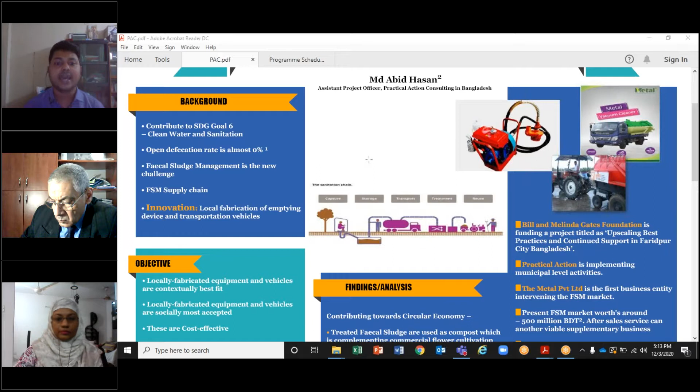We have attempted to introduce innovation in this FSM supply chain. Our innovation is local fabrication of emptying devices and transportation vehicles.

What are the objectives of this paper? First, it states that locally fabricated equipment and vehicles are contextually the best fit—meaning they will be socially, socio-economically, and infrastructurally the best fit for our country, especially for the peri-urban and rural areas.

Another point is that these locally fabricated equipment and vehicles are socially most accepted, especially by the sanitation workers who directly work with these devices, and by the beneficiaries, municipal level officials, and development workers.

These local fabrications are obviously cost effective, as we are fabricating these local vehicles and equipment using our local resources. They are very easy to maintain—our local technicians and mechanics can do the maintenance job easily. And finally, these local fabrications create more local employment.

What was our methodology for this paper? We followed a qualitative approach, and our main data collection tools were focus group discussions, where representatives from sanitation workers' cooperatives, municipal officials, and both international and national level development workers, donors, and municipal authorities took part.

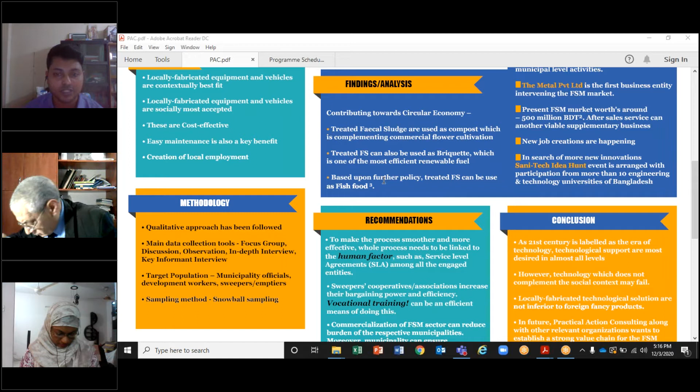Our target population were the municipality officials, development workers from both national and international organizations and donor organizations, and sweepers and emptiers who use these locally fabricated vehicles and devices. They were the main target population of our paper, and the sampling method we followed was snowball sampling.

Our theoretical framework looks like this. Our basic hypothesis was, as you can see on the left part of the screen, that locally fabricated technology strengthens the viability of the FSM service and contributes better to ensuring circular economy.

If you look at this circle, this first circle indicates that local technologies ensure better service. It means if we use these local technologies instead of manual facilities or manual systems, then more fecal sludge can be treated.

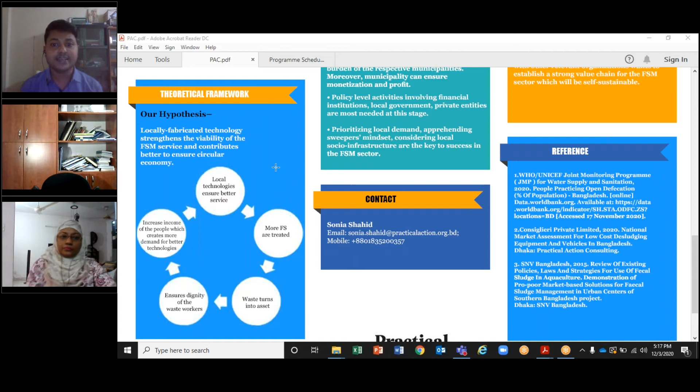By this, more fecal sludge can be treated, and when it can be treated, this waste can turn into asset. This ensures the dignity of the sanitation worker, because in the past it was perceived that the sanitation worker works with waste. But when they can establish that we don't work with waste, rather we turn this waste into an asset, their work dignity increases, and their income also increases. When their income increases, their lifestyle improves, and it creates more demand for better technologies which complement the local technologies that ensure better service.

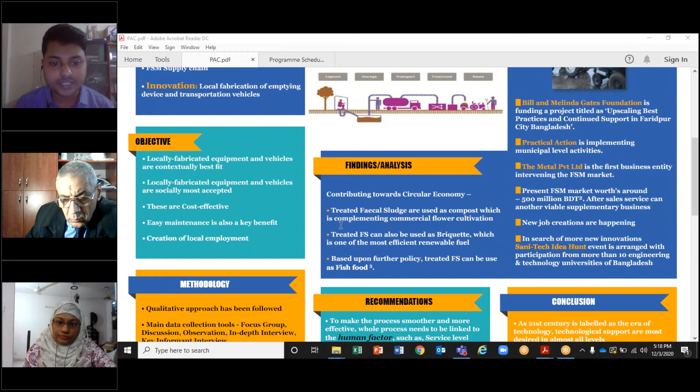So that was the basic theoretical framework of our paper. Let us look at the findings and analysis. First we will discuss the contribution towards circular economy, which indicates how this treated fecal sludge can complement circular economy. The first point indicates commercial flower cultivation in several parts.

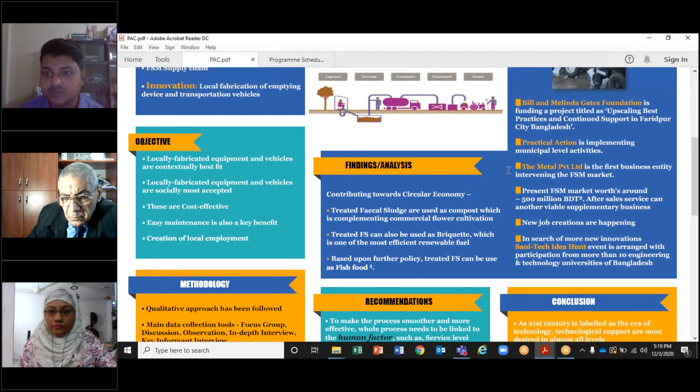There are some other analyses from our study. Before going to that, let me show you these three pictures. The left picture indicates a high capacity sucker pump which can collect fecal sludge from the containment in a very efficient and fast way.

The second part is a vacuum cleaner, generally known as a vacutug, which carries the fecal sludge to the treatment plant, and this vehicle can access narrower roads in the peri-urban areas of our country. The third picture, below, is a similar vehicle, but the difference is it is run by a tractor, which is more suitable for rural areas.

So these are the innovations we are working on to contribute to the fecal sludge management sector.

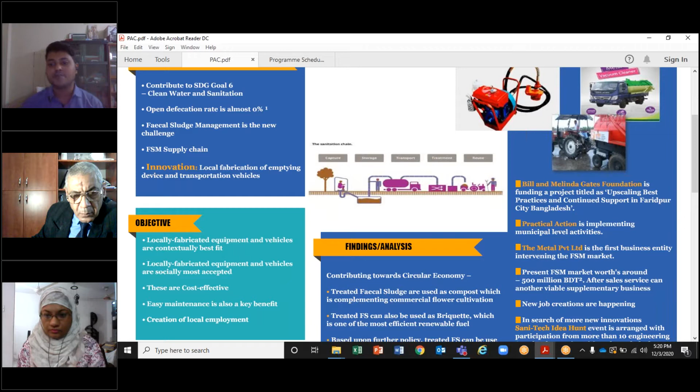As you know, Practical Action Consulting is the consulting arm of an international NGO. In this project we are funded by the Bill and Melinda Gates Foundation, and this project is titled Upscaling Best Practices and Continued Support in Faridpur City, Bangladesh. Practical Action is implementing the municipal level activities. Metal Private Limited is one of the first business entities interested to intervene in this FSM market to commercialize.

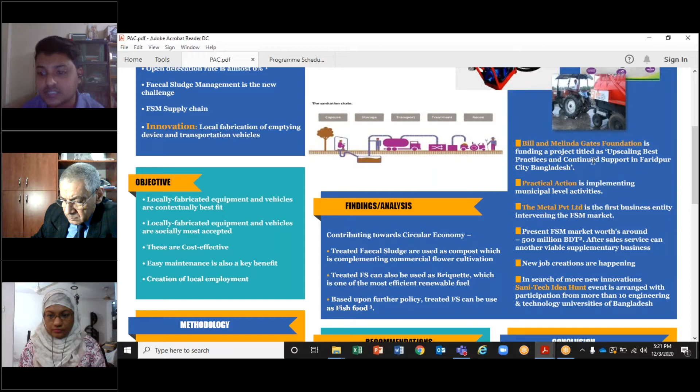As you can see, the present FSM market worth around 500 million Bangladeshi taka in Bangladesh, and the after-sales services can also contribute better in this sector.

We are not stopping here. We are also trying to generate more innovation and engage more people in this FSM sector. In that regard, we are arranging a Sanitech Idea Hunt competition where 10 universities—engineering universities, science and technology universities, and agricultural universities of Bangladesh—are participating and trying to generate new ideas to contribute to this FSM sector.

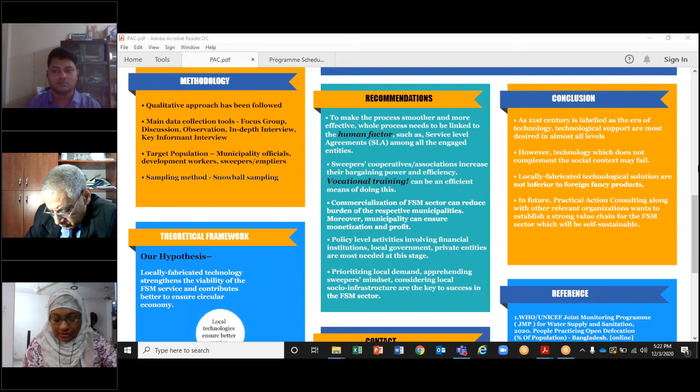In conclusion, fundamental science and applied research, coupled with market and customer needs, and the process of technology maturation through commercialization will be key to the success of establishing a strong value chain.

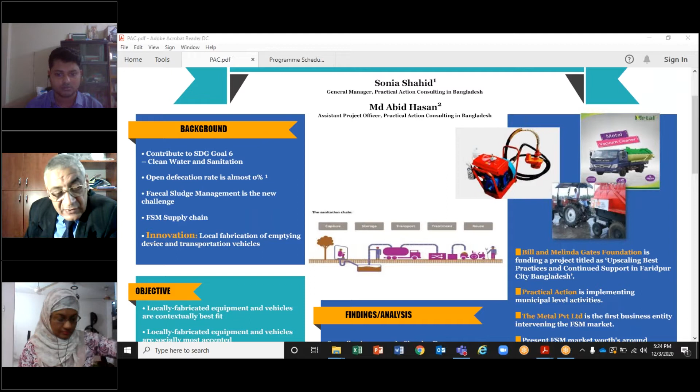But I am very concentrated on one point: when this fecal sludge is sterilized—or pasteurized, I don't know which—you didn't mention clearly what disinfectant technique is used in this sludge preparation. Because when preparing sludge for agriculture, you have to be careful about three points: first, pathogen free; second, heavy metals should be at a minimum level, meaning we are not going to accumulate heavy metals in the soil when treated with this material; third, organic molecules—meaning the sludge should not contain compounds such as hormones. So are you sure these three points are addressed in your sludge?

Because if your sludge contains animal hormones, it would be very dangerous to use in agriculture, or even if you release this material into the river or any natural water resource, it would cause a very high effect. And what about the heavy metals? Because you are not going to select the sludge only from homes—you select the sludge from the main pipe, and the main pipe contains many contaminated materials.

Yes sir, the technologies we are developing collect from both homes as well as from the pipes, and there are a few more technologies that we are working with.

I didn't understand 'from at home.' What do you mean by at home? It means at home you have two ways, for liquid and for sludge. Yes, so every home has a septic tank.

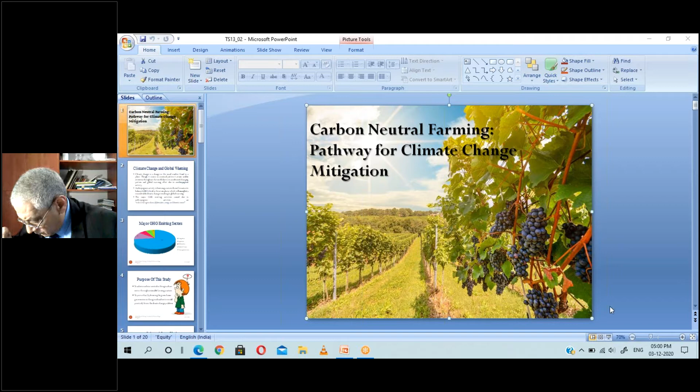Okay, good evening everyone. Myself Barney Priya. I'm here to present about carbon neutral farming, a pathway for climate change mitigation.

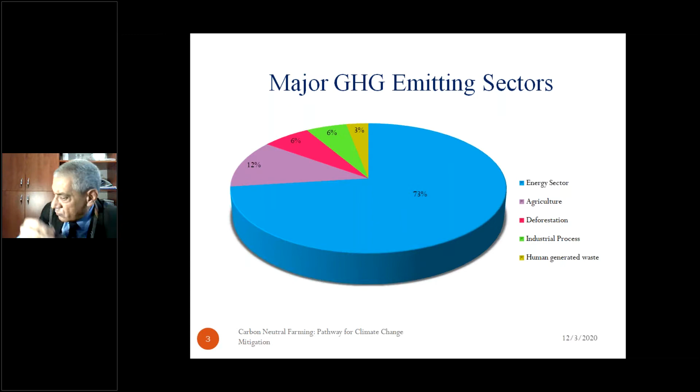The anthropogenic activities responsible for greenhouse gas emission: the energy sector holds a major dominant share of about 73%, followed by 12% by the agriculture sector, 6% due to land cover and land use change pattern like deforestation, 6% due to industrial processes, and 3% due to domestic waste generated by human beings. It is evident that next to the energy sector, the agriculture sector shares a major role in greenhouse gas emission due to human activities.

So the purpose of this study is to achieve carbon neutral farming in agriculture through sustainable farming practices, and to prove that by lowering the greenhouse gas emission in the agriculture sector, we would positively lower the climate change problems.

So we have selected a grapeyard of area of 1 acre in Dindigul, having geographical coordinates of latitude 10° north and longitude 77° east, having a tropical climate with an average temperature of about 27.8 degrees Celsius and annual rainfall of 717 mm.

The conventional practices carried out in the farm: first they prepared the land by tillage practices to remove the previous cultivation crop and remaining weeds. Next to the tillage practices, they constructed a trellis structure which supports the growth of the grapeyard. After constructing the structure, the plantation is done usually between December to January, followed by irrigation activity.

So carbon footprint auditing is carried out to find out the amount of greenhouse gases emitted in the farmland, starting from cultivation to harvesting. So in a grapeyard, it takes around 120 days for the grapes to harvest.

The possible greenhouse gases emitted through the grape yard are 49.2% nitrous oxide, 34.4% methane, 14.1% carbon dioxide, and others including hydrofluorocarbons if the grapes are stored on-site using refrigerators.

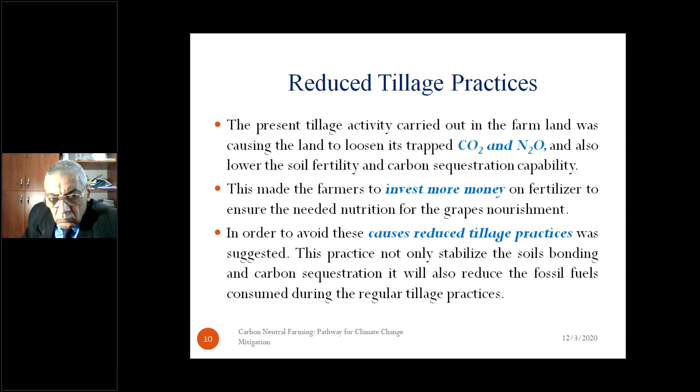So farmers need to invest more money on fertilizer to ensure the needed nutrition for the grapes' nourishment. To avoid greenhouse gas emissions due to tillage practices, we suggest going for reduced tillage or no-tillage practice. By doing so, it not only stabilizes soil bonding and carbon sequestration, it will also reduce the fossil fuel usage for tractors and power tillers used for tillage.

The next is manure management. Manure management is most important. Manure is the most important thing for a plant's growth. In particular, nitrogen is a very essential element for plant growth and development.

In the case of excess application of fertilizer, excess nitrogen is lost in ionic or gaseous form through leaching and volatilization. It would affect both the soil and the groundwater. Also, excess application of nitrogen fertilizer leads to eutrophication, which affects the aquatic ecosystem, and it also contaminates the groundwater, causing hemoglobin disorders in human beings.

On the other hand, lower application of nitrogen fertilizer causes nitrogen deficiency to the plant, which affects the growth and yield. So we suggest going for organic fertilizers because they can adapt naturally, get adjusted to the soil, and excess nitrogen can be easily absorbed by microbes compared to synthetic fertilizers. As an added advantage, this would also reduce greenhouse gas emissions from the production and transportation of synthetic fertilizers.

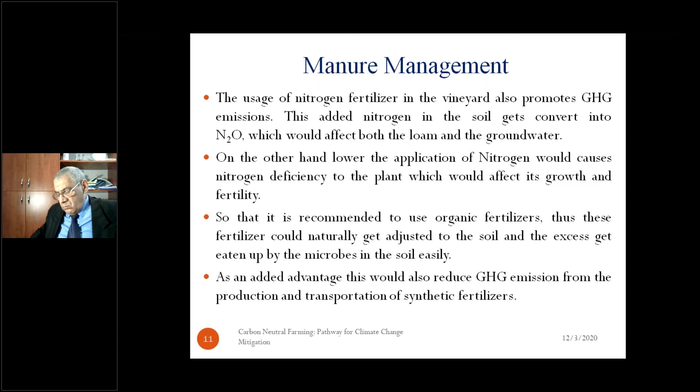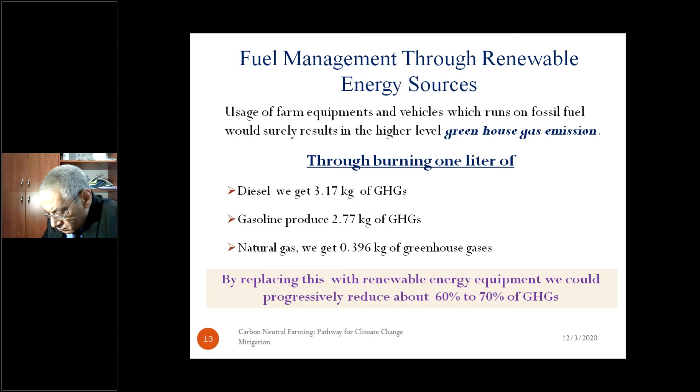But it is difficult to estimate the amount of manure required for land because it changes from place to place. The above suggested methodology will reduce around 55 to 60% of the carbon dioxide and other greenhouse gases. To sequestrate the balance of carbon, farmers can go for cover crop management.

So we conclude that conventional practices used in farming produce more greenhouse gases than the suggested alternative methods, and this not only benefits the farming ecology but also saves money for farmers, since all the proposed alternative methods are sustainable and nature-oriented steps. It is obvious that attaining carbon neutrality in the agriculture sector is a lot easier and more cost efficient compared to any other sector.

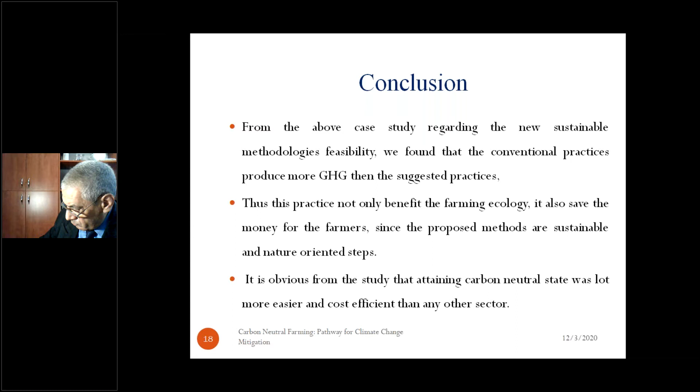The scope of this study is that this type of methodology can be adopted for various crop varieties, and it also reduces greenhouse gas emissions to a greater extent, especially in India, because India stands second in holding arable land of about 159.7 million hectares, next to the United States. If we practice this kind of sustainable method, it will greatly reduce greenhouse gas emissions, and we will have remarkable progress in addressing climate change and global warming.

Thank you for giving me the opportunity.

Thank you very much for your interesting topic. Due to my job, I am interested in this topic too, because I work a lot on climate change and soil quality. Can you tell me how we know that climate change is due to human activities? And can you tell me how climate change can affect soil quality?

Sorry sir, can you repeat once? The question again: how can climate change affect soil quality? Sorry sir, I couldn't hear you properly. Sorry for asking again, my question is how can climate change cause changes in soil quality? Soil quality, yes sir.

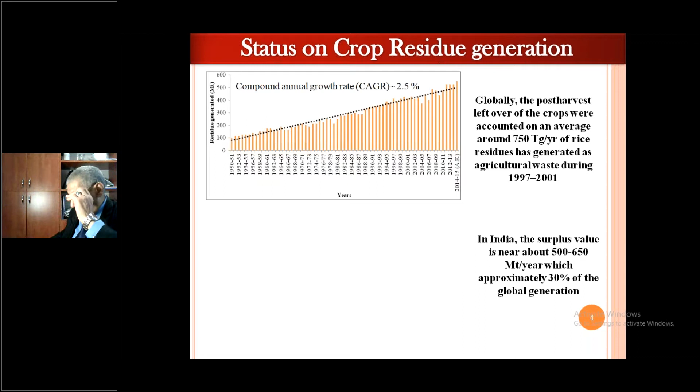This is a small diagram showing how the generation of food waste has been generated in India from 1950, since its independence, to today, and this is the trend of how it's increased—totally around 750 trillion grams of waste being generated during this time.

It's not only affecting our environment, it's also causing loss of various nutrients which can affect soil fertility. Even the agriculture industry is considered one of the greatest GHG, greenhouse gas, contributors—contributing around 12% of total GHG emissions.

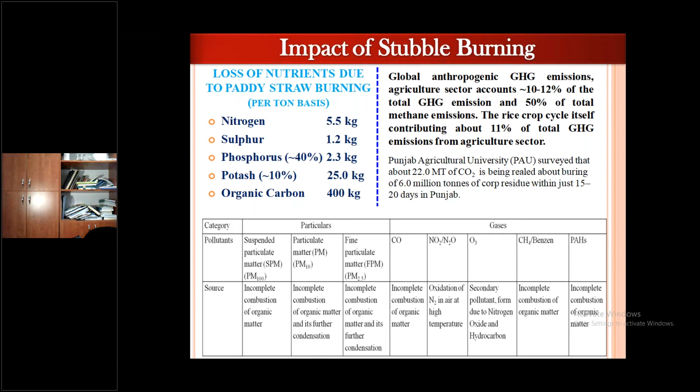These are data showing how different types of other GHGs like SOx, NOx, and other VOCs are generated from biomass burning, which is generated as crop residue. So we can say that in summary, it's not only affecting the regional place where this crop stubble is burning, it's also affecting other places.

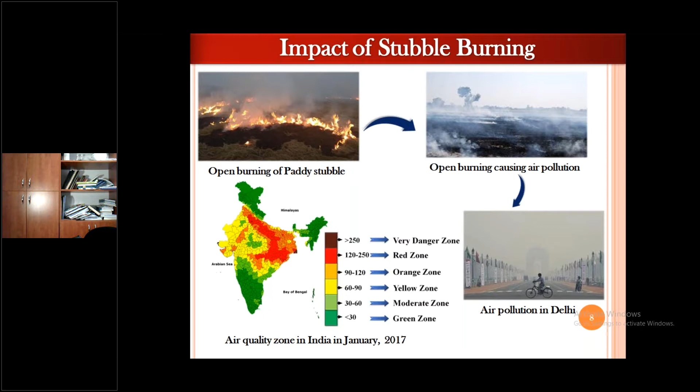It's considered unsafe to breathe in Delhi, our capital of India. In a nutshell, residue burning causes global warming, emission of greenhouse gases, release of particulate matter, loss of biodiversity, deterioration of soil fertility, and other detrimental effects on our ecological health.

So what can we do about that? There are alternative uses of crop residue. First is the generation of bioenergy. There are a few in India—recently some bioenergy thermal power plants have been installed which utilize this crop residue to generate thermal energy converted to electricity. The Punjab Energy Development Agency has already developed a few plants, and they have a target to generate around 500 megawatts of power from this paddy stubble based thermal power plant. This approach can be taken up throughout India to mitigate this issue.

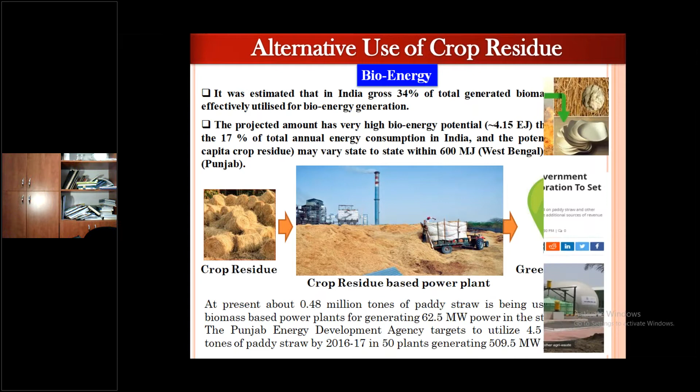Other than this, some enterprises and entrepreneurs are trying to develop other commercial products like tableware or food containers and medium density fiberboard, which can replace the use of thermocol and plywood, both of which have detrimental effects on the environment.

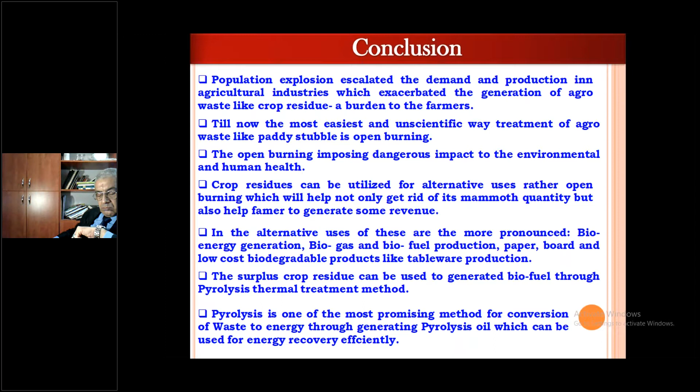In conclusion, due to the population explosion, food demand is increasing. That's why there is huge pressure on the agriculture industry, and as crop demand increases, crop residue also increases, which is one of the biggest burdens to farmers. To get rid of it, farmers usually burn it out in the open environment, which causes serious health issues and environmental effects on our climate, contributing to climate change.

So, other than burning it, we can put it to alternative use, which not only helps mitigate the detrimental effect on the environment but also provides some revenue to the farmers from whom the crop residue comes. Other than byproducts, the surplus crop residue can also be treated to generate biofuel through heat treatment, the pyrolysis treatment process.

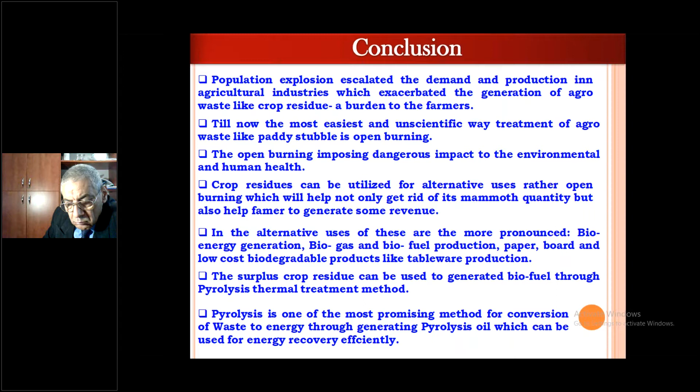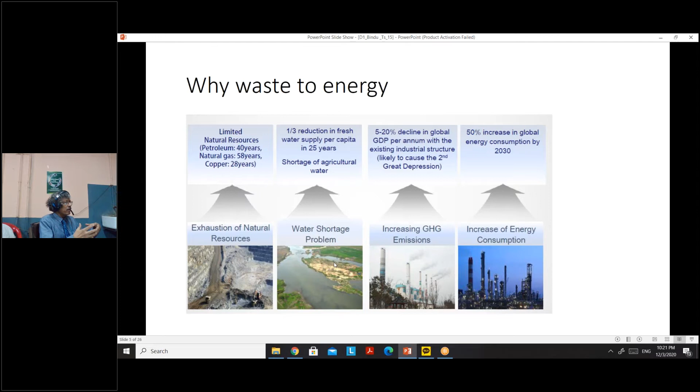There are limited resources in our environment, water shortages, increases in greenhouse gas emissions, and increases in energy consumption. So why waste to energy? Is there any solution? We are hoping that using waste as energy could provide some solution environmentally, economically, and in terms of energy.

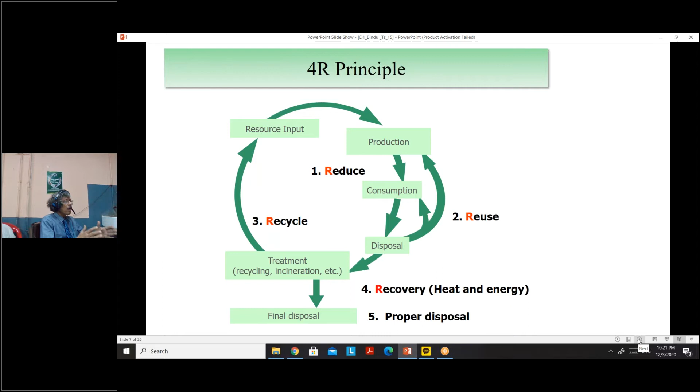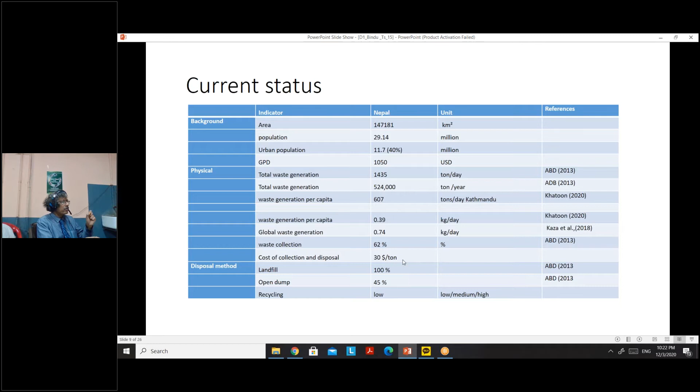This is some of the current status of Nepal - background, physical status, and disposal methods. We have about 29 million population with 40% urban area, and around 1,000 GDP. In terms of waste generation, we see about 524,000 tons per year, which is about 0.4 kilograms per capita per day - not that much compared to the global average. We spend almost $30 for collection to disposal, and the most common disposal method is landfill.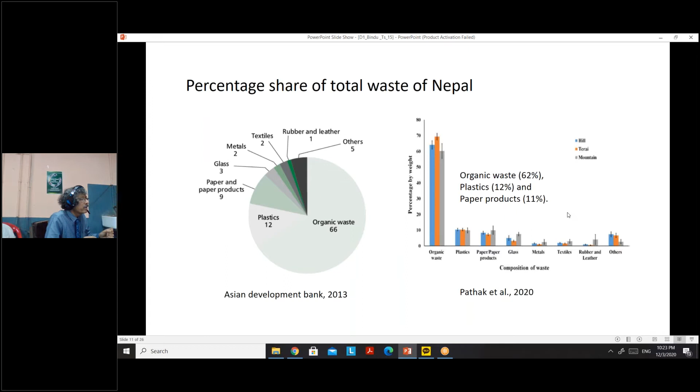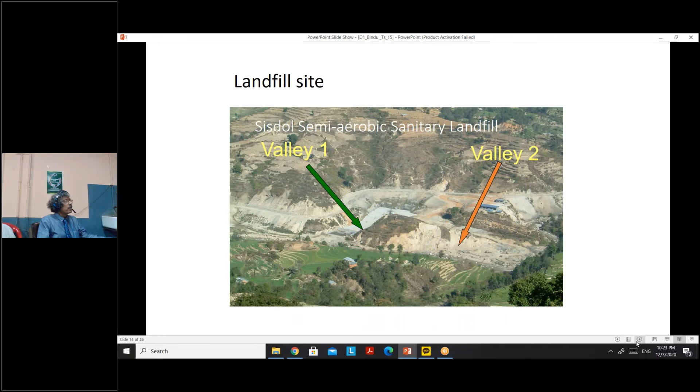These are some photos showing how we manage waste. For collection and transportation, we basically collect all kinds of mixed waste, then segregate it at the landfill site manually. This is an example of our landfill site, which reflects very poor conditions - we simply unload the waste, spread it, and do very simple soil covering, with no other technology.

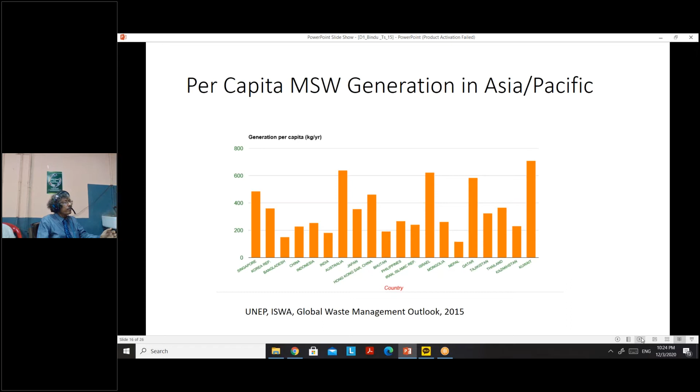If we compare waste generation in Asia and the Pacific, we are actually okay in terms of generation - we are among the lowest countries compared to others.

However, some countries like capital Kathmandu and other urban cities generate lots of waste. When comparing per capita generation, Nepal and India are doing pretty good compared to other Asian countries.

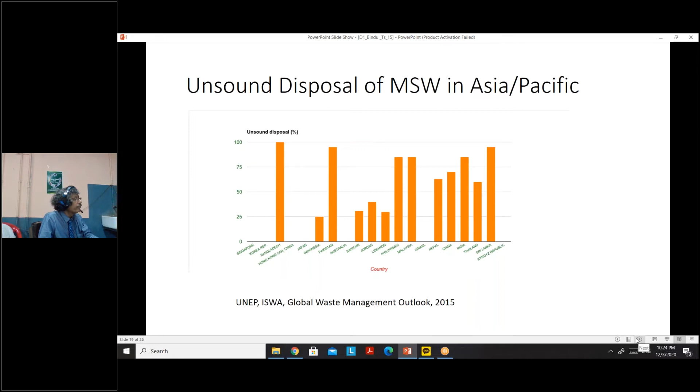But the problem is unsound disposal. More than 65% of conditions involve disposing waste in the bad, improper way. Unfortunately we don't have data about recycling in Nepal, so this is also not good. However, there are very few percentages of informal recycling and composting going on.

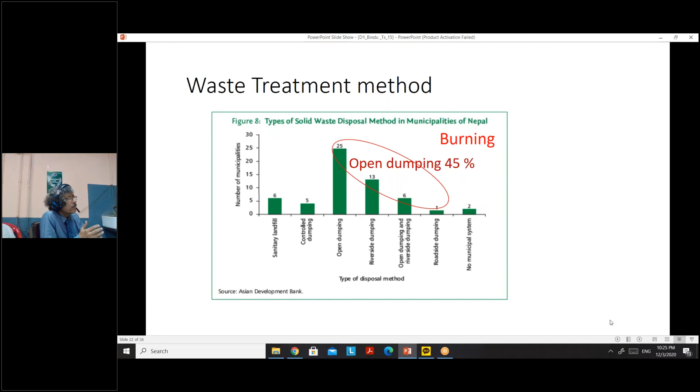So we do waste treatment mostly by open dumping, which is about 45%, and the remaining is burning. We can see sanitary landfill and control is less than 10%. So I'm just thinking this may be one way to manage the waste.

So we divide municipal waste into organic and inorganic, and organic, general, and recyclable waste. General waste we can treat with different technology to produce gas, electricity, and energy. With organic waste, through biological treatment, we get gas and compost. Then the remaining residual goes to landfill for methane collection.

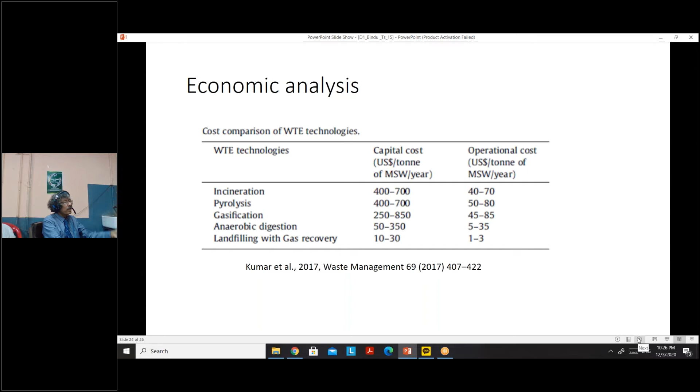We have to consider economic analysis, especially for countries like Nepal where we are very poor with low GDP. Having incineration and pyrolysis, both operation and capital costs are much higher, so considering this analysis we have to make some plan.

To summarize, first of all we must segregate waste at the source, which is most essential. Then the suitable methods for Nepal's case are composting and anaerobic digestion, and then we can move to incineration and sanitary landfill. Recovery means energy extraction from waste by incineration.

We may use incineration for waste management, however if we want more energy, we need more waste. This approach is also problematic. So if reduction, reuse, and recycling do not come ahead of energy recovery, we may discharge more waste and combust it. So emphasis goes to reduction, reuse, recycling, then recovery and proper disposal.

So we have to develop our policy mix to implement institutional arrangement and public awareness, and also behavior changes of our citizenship, and then finally we must have some investment from the private sector to fund waste to energy for proper waste management. This is the end of my presentation, thank you very much.

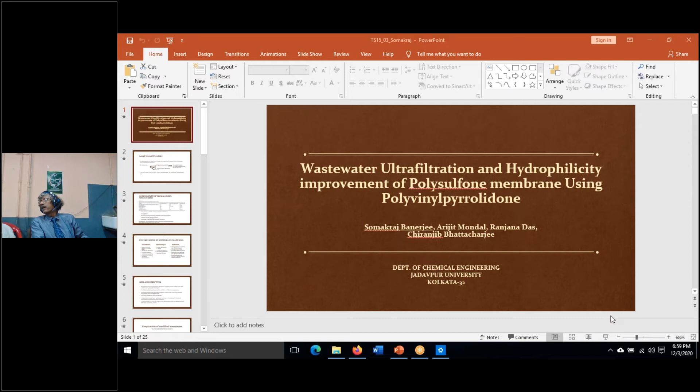Please continue. Good evening everyone. I am Somakraj Banerjee from Jadavpur University, and I will be presenting my work on wastewater ultrafiltration and hydrophilicity of polysulfone membrane using polyvinylpyrrolidone.

So first we start with what is wastewater. It's a combination of liquid and water transported waste from industrial sources, and it contains organic, inorganic matters and gases. In this particular work, I will be working with organic matter, that is protein.

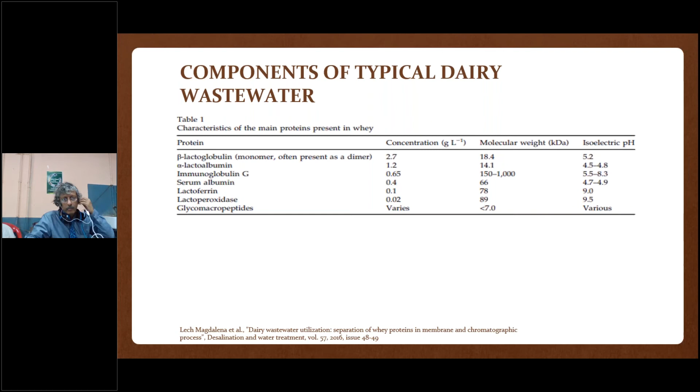So I will be working with typical dairy wastewater, and these are the typical characteristics of dairy wastewater. The proteins of interest are serum albumin, lactoferrin, and lactoglobulin. It works as an antioxidant by protecting lipids from oxidation, so it has importance in food and pharmaceutical industries.

So I have chosen polysulfone as the membrane material, which has superior thermal stability, a glass transition temperature around 200 degrees centigrade, mechanical robustness, and chemical resistance. But it also has some disadvantages, like it is strongly hydrophobic in nature, which limits its permeability in wastewater treatment, and poor fouling resistance.

So I have tried to add polyvinyl pyrrolidone into the system to increase its hydrophilicity, and I have used polyvinyl pyrrolidone in different weight percentages to see the changes in the system.

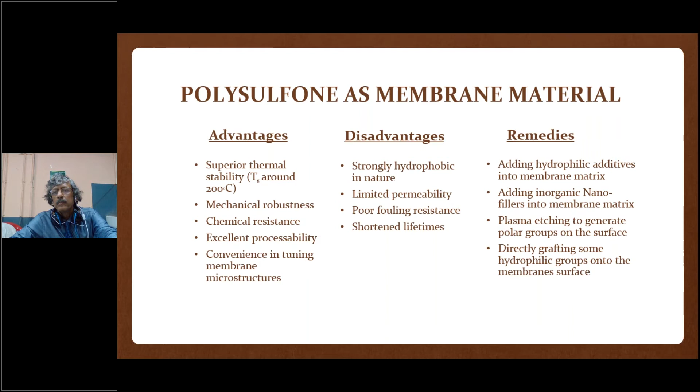So these are my aims and objectives. The primary objective is modification of the membrane with an additive and characterization of the prepared membrane with liquid-liquid displacement porosimetry and transition test, and to experiment in a wide pH range to find pH dependency of the membranes and the whole separation process, and preparation of model dairy wastewater and use it for wastewater treatment application by the selected best method.

The materials used are polysulfone of 35 kDa, polyvinyl pyrrolidone of 360 kDa, and dimethyl acetamide as the solvent, and deionized water as the non-solvent. This is the composition given in my membranes.

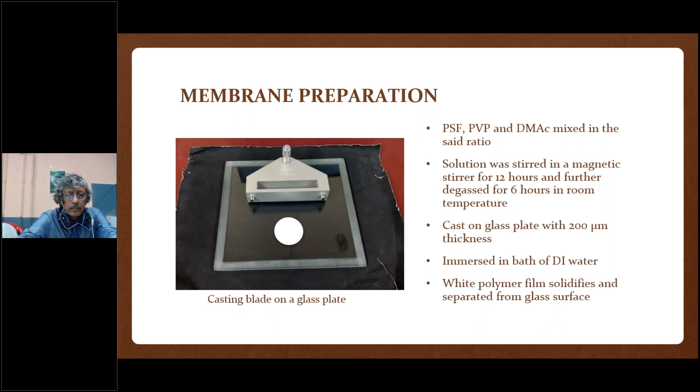This is the prepared membrane. The solution was stirred in a magnetic stirrer for 12 hours, then for 6 hours, and then immersed in DI water with casting on a glass plate at 200 micrometer thickness using the phase inversion method.

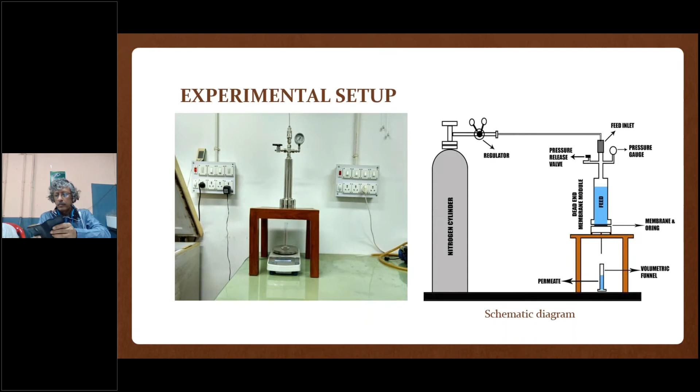Now I come to membrane characterization. These are the characterization processes I followed. The first is liquid-liquid displacement porosimetry. This is my experimental setup, a dead-end filtration module, and with this I have performed all my experiments.

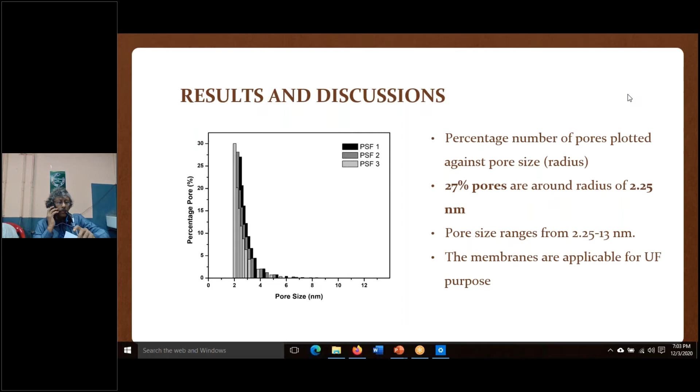Coming to the results of the LLDP process, the percentage number of pores is plotted against pore size, and we can see 27% of pores are around 2.25 nanometers, with pore size ranging from 2.25 to 13 nanometers. The membranes are applicable for ultrafiltration purposes.

With increasing PVP percentage in the membrane, the total number of pores increases, and in our membranes greater than 90% of the pores lie in the 2.25 to 4.06 nanometer range. There is a marginal decrease in mean pore size from 2.38 nanometer to 2.28 nanometer with increasing PVP added.

Since the total number of pores and total permeability is seen to be increasing, it can be inferred that the addition of PVP in higher percentage increases the porosity of the membrane.

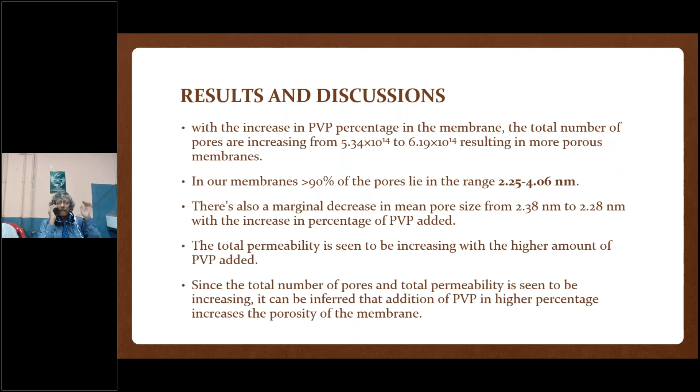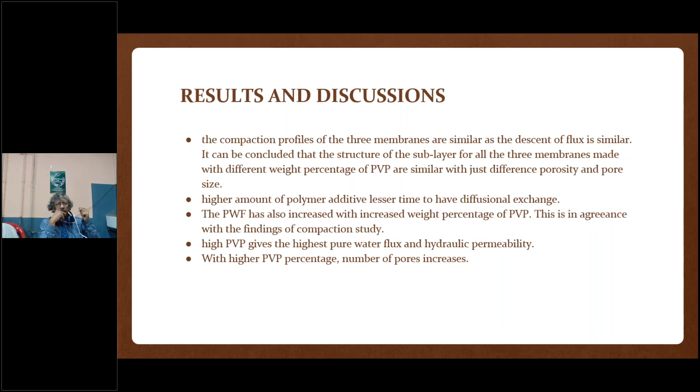So a higher amount of polymer additive and lesser time for diffusional exchange in the phase inversion process may be making the hydrophilicity higher.

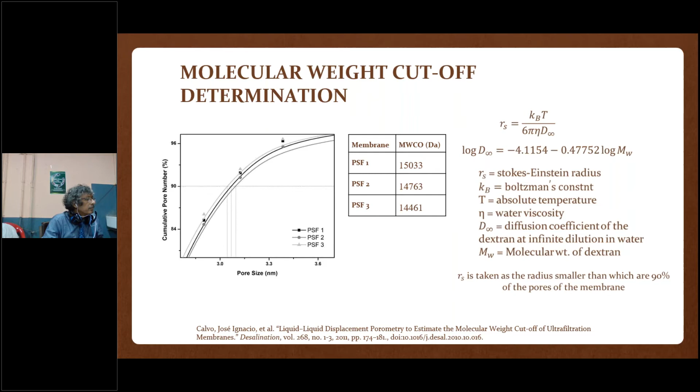Now coming to the molecular weight cutoff determination, a semi-empirical method has been employed, where the Stokes-Einstein radius has been used to determine the relation between the molecular weight cutoff and the molecular cutoff of the membranes. With increasing polyvinyl pyrrolidone percentage, we can see that the molecular weight cutoff decreases.

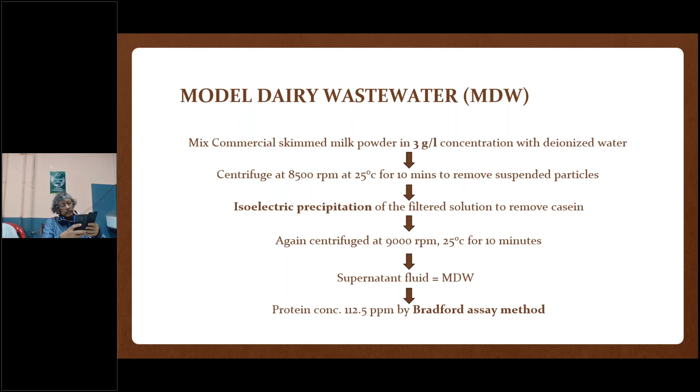We made a model dairy wastewater with commercial skim milk, treated and centrifuged after isoelectric precipitation to get supernatant fluid, which after characterization by Bradford's method showed protein concentration of 112.5 ppm. After ultrafiltration of this model dairy wastewater, at pH 4.8 using the PSF 3 membrane, which has the highest polyvinyl pyrrolidone percentage, we get 74.93% rejection of total protein at 40 psi.

At pH 7, the rejection is 79%, which is higher than the isoelectric condition.

Steady state flux of 9.7 liter per meter square hour at 40 psi with pH 4.8, and steady state flux higher than that at pH 7 has been found.

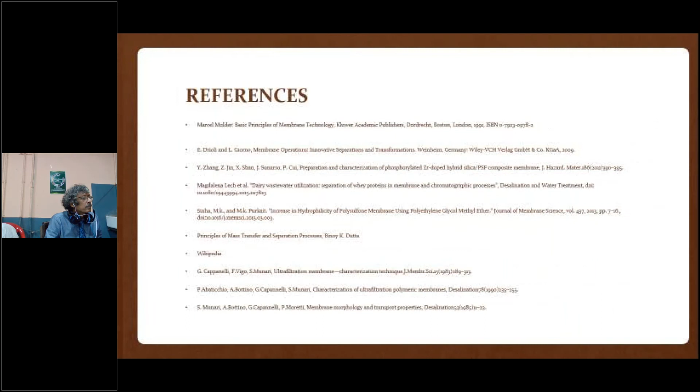These are the further prospects. These are the references. These are my acknowledgements. And thank you.

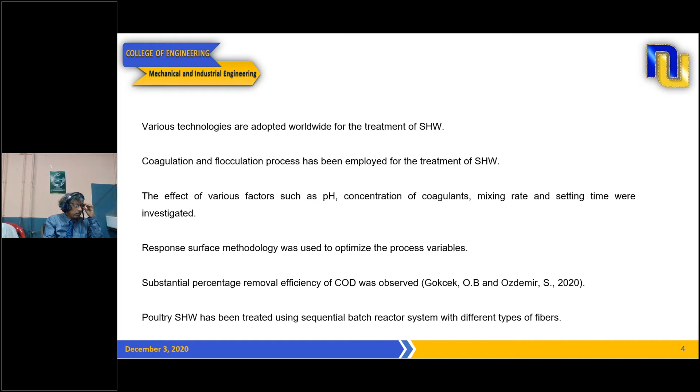In the literature, several technologies have been reported for treatment of slaughterhouse wastewater, including coagulation and flocculation processes, wherein the effect of various factors such as pH, concentration of coagulants, and mixing rate were studied, and optimization methods such as response surface methodology were used to optimize the process.

A substantial percentage removal efficiency of COD was observed, and the wastewater was also treated using a sequential batch reactor system with different types of fibers, biofibers reported.

The methodology used in our study is as follows: samples were collected from Muscat municipality slaughterhouses, then stored at room temperature. Before conducting the experiments, the water samples were filtered to remove particulate matter, and initial parameters were measured.

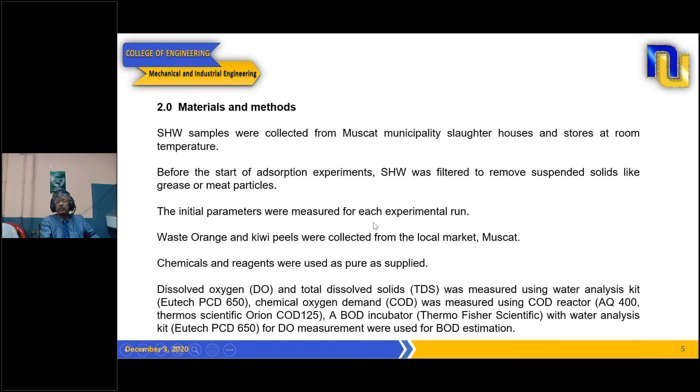The adsorbents, that is the waste orange and kiwi peels, were collected from the local market, and various parameters were studied including dissolved oxygen, total dissolved solids, and other parameters listed here.

For adsorbent preparation, the collected fruit peels were washed thoroughly to remove any impurities, then treated with deionized water. The samples were dried to remove moisture and ground to the required particle size, then calcined at a temperature of 250 degrees for about 12 hours to produce the required carbon.

This was then added with sulfuric acid, and the resulting mixture was kept overnight by refluxing for 12 hours. Then the carbon was filtered, washed with water, and heated to remove the moisture content.

The treated carbon was soaked in 1% sodium bicarbonate to remove any remaining traces of acid. Then the carbon was filtered and its pH was determined, then dried, and the resulting activated carbon of both orange peels and kiwi peels was stored for further experimental studies.

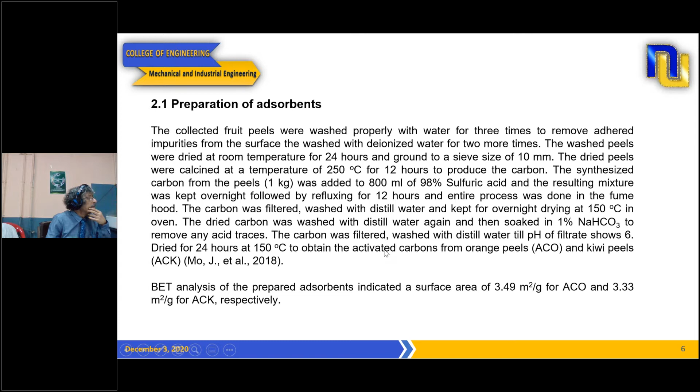Then BET analysis was carried out to determine its surface area. In our experiment, batch experiments were carried out using the prepared activated carbon, where the calculated amount of adsorbent was added and the mixture was allowed under constant stirring. Samples were taken at regular time intervals and parameters were measured. The pollutant removal efficiency was determined in terms of percentage removal efficiency.

So these are our results. The percentage removal efficiency was studied in terms of the contact time. As we can see, with the increase in time, the percentage removal of the contaminants increased. The parameters studied here were dissolved oxygen, chemical oxygen demand, biological oxygen demand, total dissolved solids, and phosphate. So the percentage removal efficiency increased with the increase in the contact time, and it was considered for 3 different time durations.

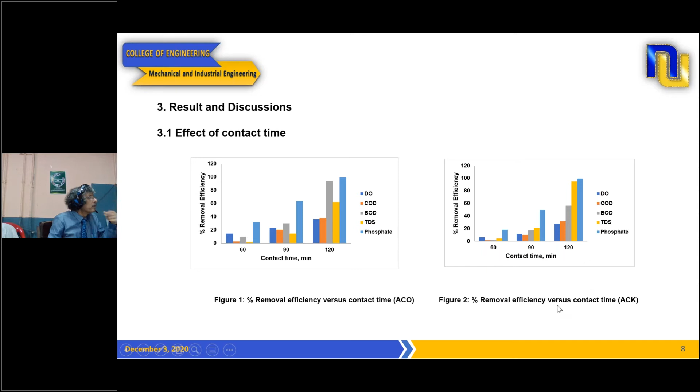Okay sir, right. So percentage removal efficiency and contact time was also studied for both the activated carbon of orange peel as well as the kiwi peels. Then the adsorbent dosage was studied for different concentrations of the adsorbent. As we can see, this percentage removal efficiency increased with increase in the adsorbent concentration.

Then the samples, the experimental data was fitted for Langmuir and Freundlich isotherms. So the results are presented here.

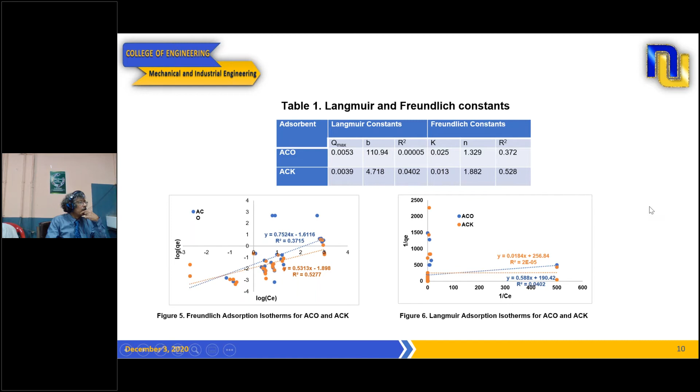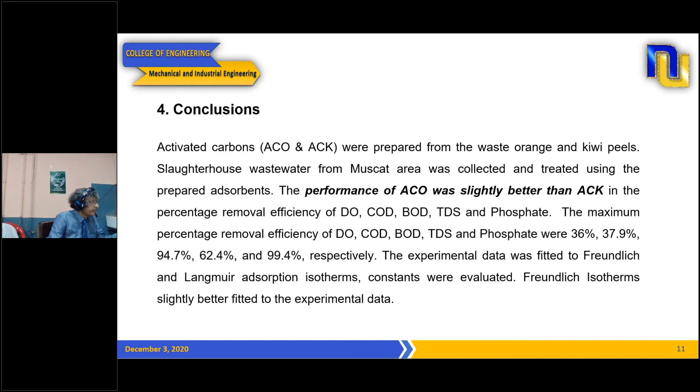So in the final concluding remarks, both the activated carbon samples of orange peel as well as kiwi peel were prepared, and the collected water samples were treated using the prepared adsorbents. It was observed that the performance of activated carbon of orange peel was better than the kiwi peels in terms of their percentage removal efficiency of various parameters studied. Also, the experimental data was fitted to Freundlich and Langmuir adsorption isotherms, and their constants were evaluated, wherein the Freundlich isotherm was found to be slightly better fitted to our experimental data.

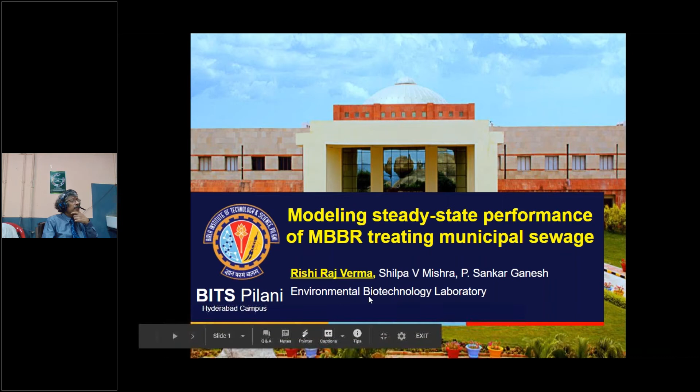As we all know, wastewater is any water which has been contaminated by human use. The major sources include household, industrial effluent, or a mixture of both. Wastewater treatment is a fundamental duty of our society, as it has many advantages. One reason is it leads to water restoration in our water cycle, and it also leads to resource recovery, like nitrogen, phosphorus, etc.

As a part of my project, I developed a model which can be used in treatment of water. For developing that model, I used software named GPSX, developed by Hydromantis company. Using GPSX software, we can design various wastewater treatment plant models, and this software is used in industries also. The access was provided to us by Hydromantis under educational license.

Moving bed biofilm reactor is an economical solution offered for wastewater treatment if the bulk of the pollution load must be disposed. The MBBR system consists of an activated sludge aeration system where the sludge is collected on recycled plastic carriers, generally HDPE, high density polyethylene, and these carriers have an internal large surface for optimal contact of water, air, and bacteria. These bacteria, activated sludge, grow on the internal surface of the carriers, and eventually when the wastewater comes into this tank, it breaks down the various organic matter present, and then the water is sent to the clarifier tank for further tertiary treatment or for release.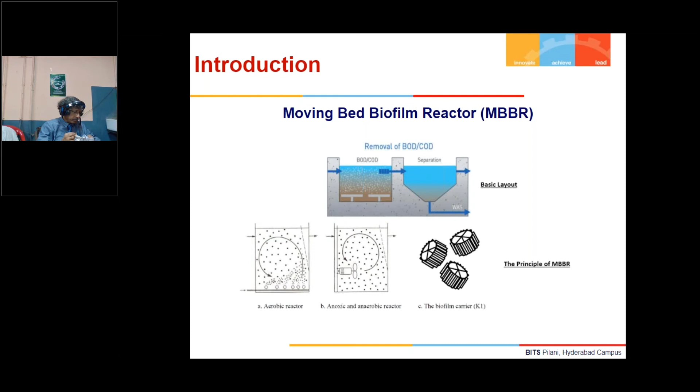So MBBR process can be used for a variety of different applications to attain the desired results depending on the quality of wastewater and discharge regulation. So our project included determining those parameters on which we can increase the efficiency of the MBBR system. So this is the methodology that we used.

We use GPSX software for creating various simulations of various characteristics of incoming wastewater, various aeration rates, and all.

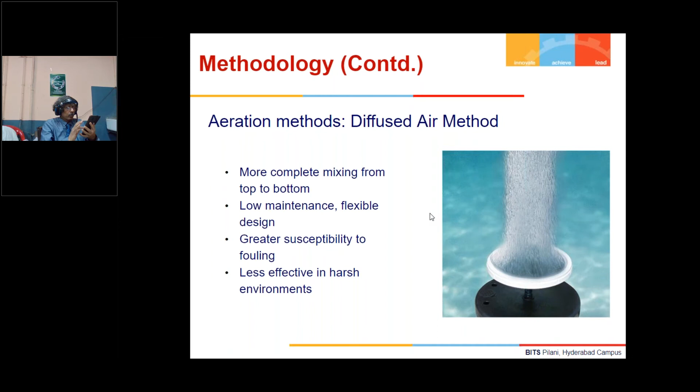Diffused air method consists of small diffusers present at the bottom of the tank, through which air bubbles are released into the tank. It has complete mixing from top to bottom, and low maintenance cost, but it is prone to greater susceptibility and fouling, and is less effective in harsh environments, referring to the presence of various other chemicals.

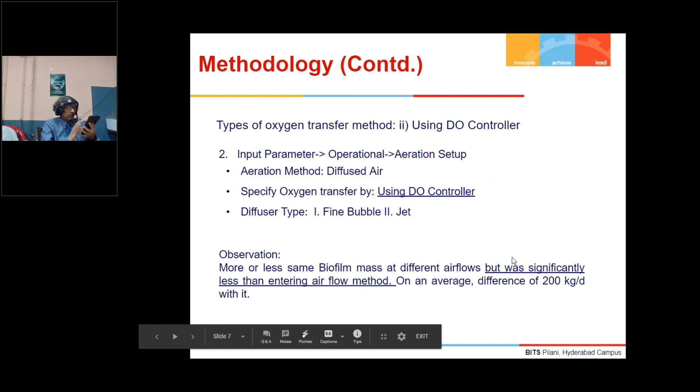As part of our project, we simulated various results and obtained this: with increase in the aeration rate, biofilm mass decreased. Similarly, when we used the DO controller, more or less the same biofilm mass at different was produced at different airflow, but it was significantly less than the entering airflow method. Similarly, we then used the entering KLA method for specific oxygen transfer, and observed a similar trend.

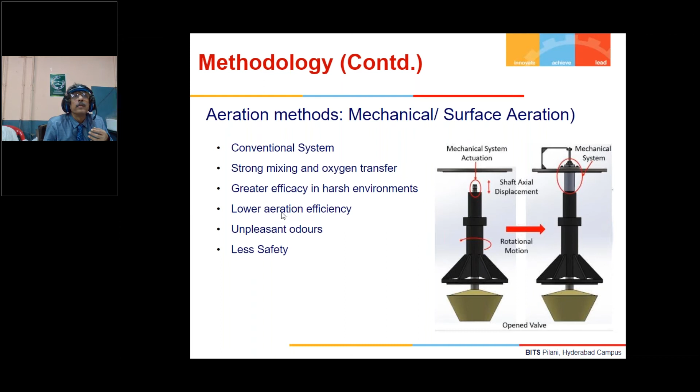Coming to the mechanical aeration method, this is a conventional system which includes a rotating shaft operated physically or using a generator. It has strong mixing and oxygen transfer, but lower aeration efficiency, and it gives very unpleasant odors.

So again we simulated various aeration rates and saw how biomass was produced, and we observed that the diffused air method came out to be better compared to the other method. At this point we concluded that diffused air method is better than any other method for use in MBBR, and from this point we used only the diffused air method for all other simulations.

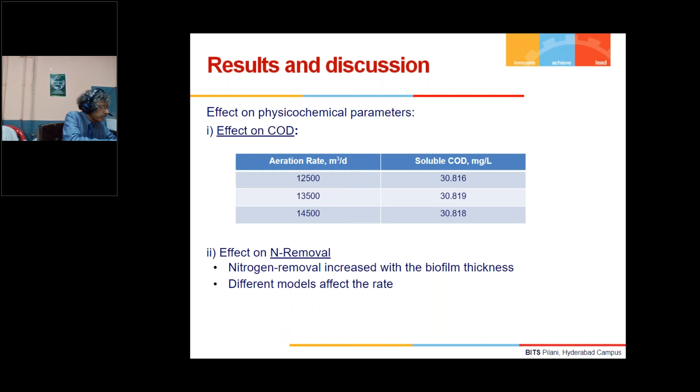We observed various results and saw that there was no effect on COD, and similarly nitrogen removal was increasing as the aeration rate was increasing. Similarly, for total suspended solids and volatile suspended solids, it was decreasing with increase in aeration.

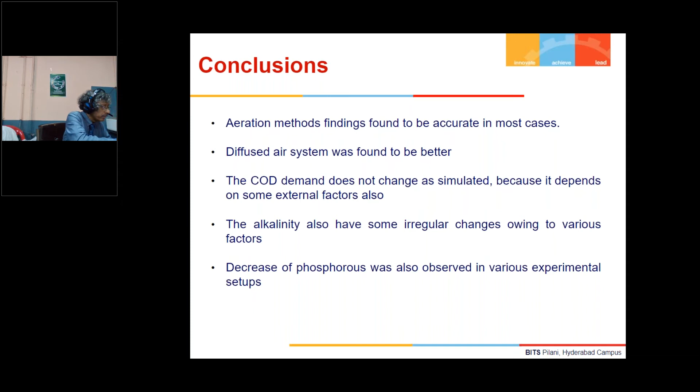Coming to the conclusion, we can say that the aeration method finding was found to be accurate in most cases, and diffused air system is the best to use in MBBR, and the COD demand does not change as simulated because of some external factors, also maybe due to denitrification.

The future aspects of this project can be: the findings can be verified using actual lab experiments, and more complex variations can be introduced into the MBBR system, to obtain various correlations between various microorganisms and the pollutant.

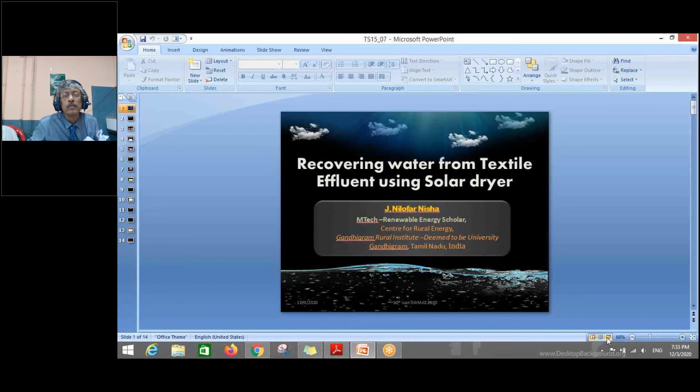Good evening everybody. I'm Nilofar Nisha, PG scholar from the Department of Renewable Energy, Gandhigram Rural Institute, India. Here, I'm going to present my academic project, which is about recovering water from textile effluent using solar dryer by implementing renewable energy technologies.

Due to rapid urbanization, environmental pollution is reaching its peak. At the same time, human well-being and their activities are also affected by the development of industries. Nowadays, we are running towards sustainable energy or processes as the world is on the mere edge of environmental safety. One major problem every country faces is water-related issues, mainly the availability of clean water. In India, the government is showing more interest and spending huge amounts of money for cleaning and conserving the water bodies. Here in India, textile industries contribute highly to economic development, and on the other hand, create more environmental pollution.

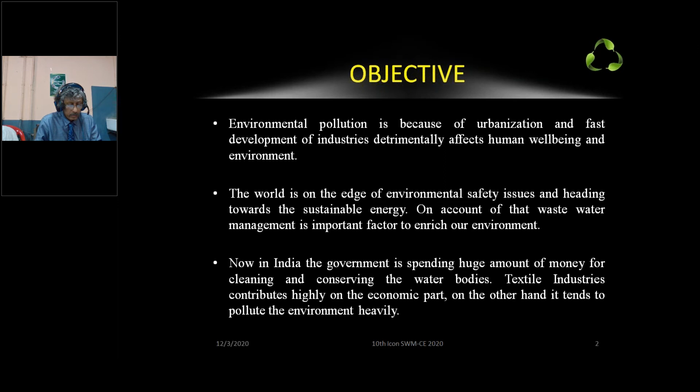Our focus is to convert wastewater coming out from the handloom dyeing units into recyclable water using renewable energy technologies. And also, we are investigating feasible ways of moisture recovery from the solar drying process.

What's the problem we are facing? Fresh and clean water is a limited resource. The need for fresh and clean drinking water is increasing rapidly. It is estimated that many Indian villages are facing the problem of contaminated water.

As our focus is mainly on textile industries in India, we started looking in detail at the stages of operation. Water plays a vital role in textile industries and their requirement is huge in varied processing, including bleaching, dyeing, printing, and boiling. 38% of water is consumed in bleaching, 16% in dyeing, 8% in printing, 14% in boiler, and the remaining 24% for all extra activities.

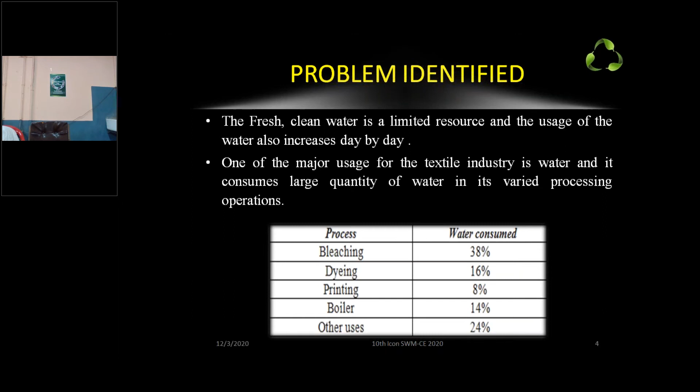Textile dyeing is a popular environmentally unfriendly industrial process because it creates colored wastewater that is greatly contaminated with dyes, textile auxiliaries, and chemicals. This wastewater can be toxic to marine organisms due to the existence of metals, chlorides, and breakdown particles of dyes. Textile industries symbolize a central environmental trouble because of high water consumption. Textile effluent is a cause of significant environmental degradation and human illness.

Here is how we implemented renewable energy technologies in our project. We used a solar drying unit. The solar dryer works based on the principle of the greenhouse effect. The short wavelength radiation from the sun enters the solar dryer's drying glazing and is converted into heat. This heat is used to evaporate the wastewater from the handloom dyeing units, while the remaining dyes get deposited at the bottom surface as sediments. These dyes can be further used for handloom dyeing units.

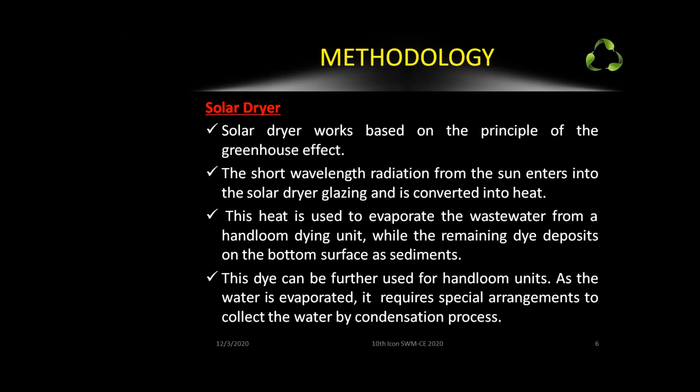From the solar dryer unit alone, we cannot get fresh water as such. As the water gets evaporated, it is condensed and collected at the top of the dryer unit. As I already mentioned, it requires some special arrangements to recollect the condensed water from the dryer unit. For that purpose, a heat exchanger can be installed outside the solar dryer and connected to an air extractor which ejects the vapor produced during the process.

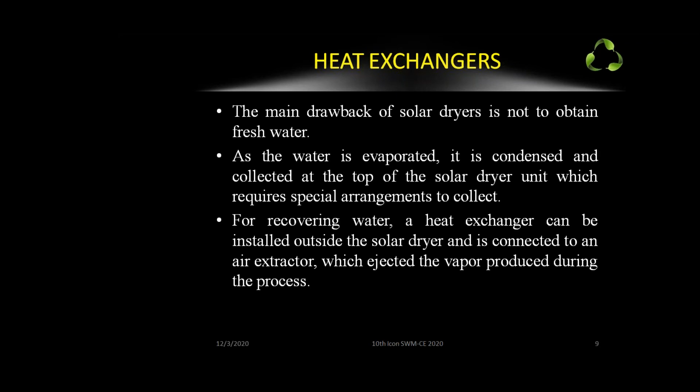It's a planned future work. We have planned to extend our already existing solar dryer unit in our university with a heat exchanger at the backside of it. In that, we will be attaching an air extractor, heat exchanger, condensate receptor, and a refrigeration system.

Coming to the conclusion, a small industry like handloom textile and dyeing unit generates less wastewater in quantity, and the existing technology is not cost efficient for the treatment. It can be seen that effluent loses water steadily from 50 to 60 degrees Celsius, and this temperature can be achieved in the solar dryer unit. Thus, wastewater can be recycled and the water obtained can be reused for multiple purposes, minimizing the usage of fossil fuels.

At last, the objective of setting up the heat exchanger was to condensate the vapor produced while collecting the textile water inside the solar dryer.